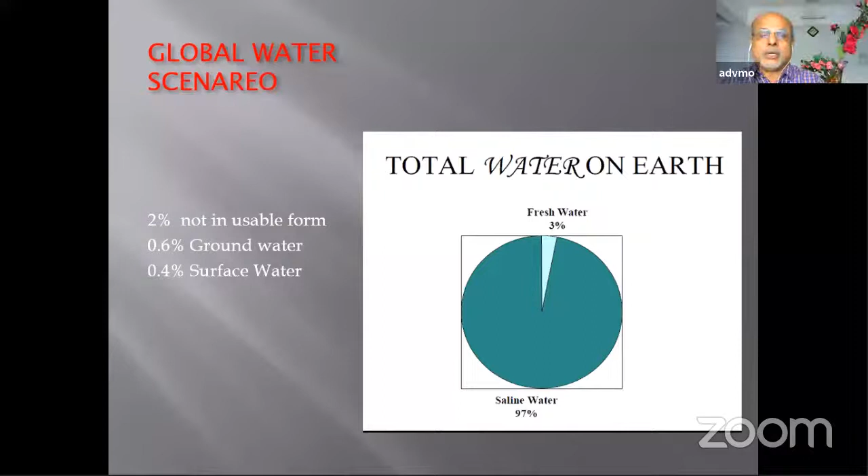Now, when we quantify the water availability, globally, there is 22.62 million cubic kilometers of water available. And in India, we have 253 billion cubic meters. And coming to Kerala, the availability is 6.62 billion cubic meters.

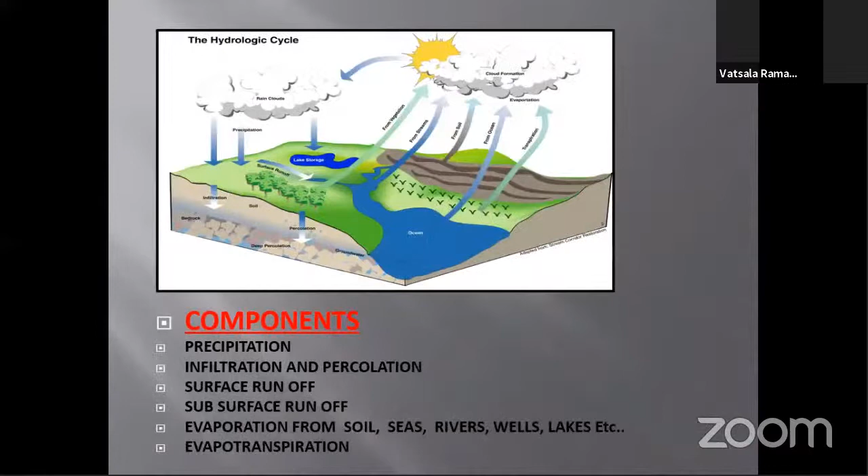Now, let us have a very preliminary idea of what actually groundwater is, because we are going to discuss the use, conservation, and recharge of groundwater. We should know, not the high technical definition, but at least what actually is groundwater and what actually is not groundwater.

You might have come across this hydrologic cycle. We know the water available on earth is in a cyclic process. These are all the components of this hydrologic cycle. One is precipitation, the rainwater reaching the surface of the earth. When the rainwater reaches the surface, one portion passes to the rivers and streams as surface runoff, then a little portion percolates into the earth, which again gets transferred to the rivers and seas as subsurface runoff.

Then a particular portion will be going and reaching the groundwater resources. From the surface, water will be evaporated to the atmosphere from the seas, rivers, wells, lakes, from everywhere. This water will be evaporating and entering into the atmosphere. Even from the leaves of the trees, a particular quantity of water will be evaporated, called evapotranspiration, which also joins the atmosphere.

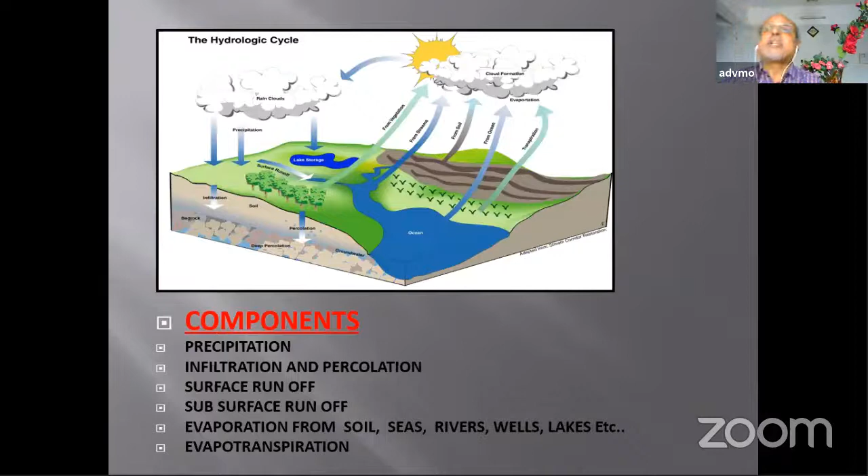So when we think about groundwater recharge, we should bear in mind that we can alter either component of the hydrologic cycle. Either we can reduce the surface runoff or the subsurface runoff. Reducing the surface or subsurface runoff will invariably increase the percolation rate. This is the basic principle - manipulation of any component in the hydrologic cycle is the principle behind groundwater recharge.

Why I'm highlighting this definition is because there is a misconception about groundwater even among educated people. For some people, the water they're tapping through borewells and tube wells is the only groundwater, and the water tapped through open wells is not groundwater. But precisely applying this scientific definition, whatever water we tap through open dug wells, borewells, tube wells, or filter point wells - every one of that is groundwater.

Because of this misunderstanding about the groundwater definition, even the educated community thinks that when we drill some borewells in particular places, that will affect or grab away the full groundwater resources and affect the open dug wells in that area.

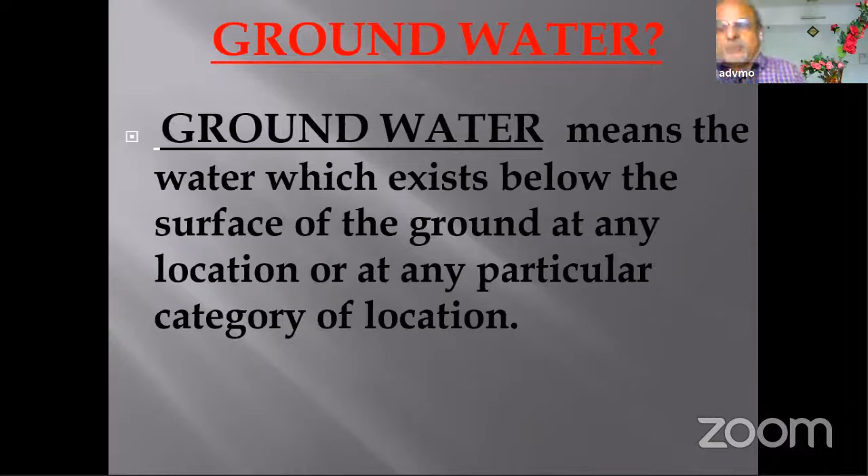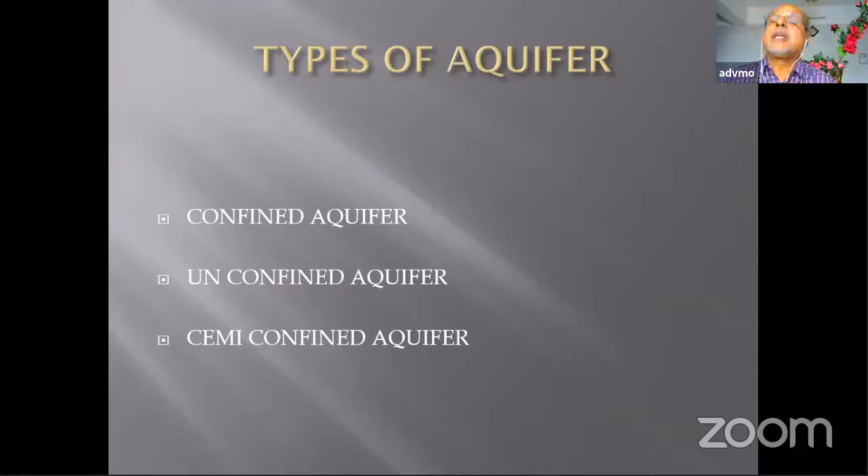There are three types of aquifer, such things we will leave - one is confined aquifer, unconfined aquifer. The thing is, almost all open dug wells tap the unconfined aquifer, and almost all borewells and tube wells tap the confined aquifer. Notice that these two - confined and unconfined aquifers - generally in 99% of cases are not interconnected. So the interference between borewell and open well is a misconception in general terms.

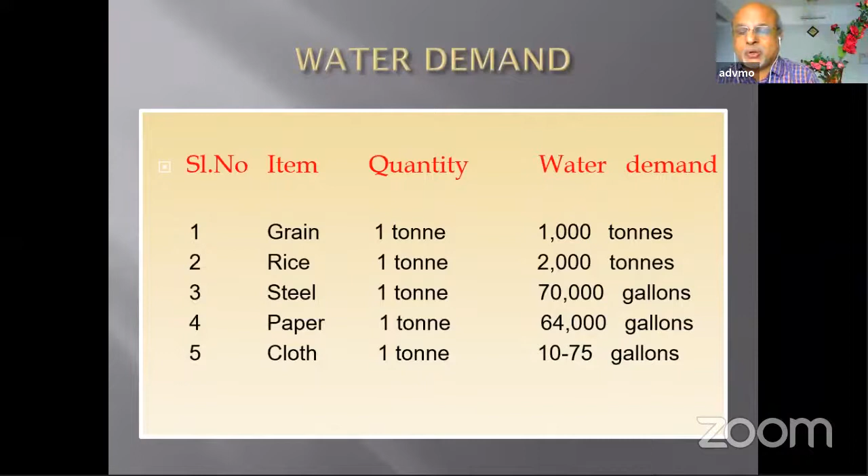Now let us look at the various water demands. For producing 1 ton of grain, we need 1,000 tons of water. For producing 1 ton of rice, we require 2,000 tons of water. You may wonder why we need water for producing steel, but to produce steel we require 70,000 gallons. And even for producing 1 ton of paper, we need 64,000 gallons of water. For 1 ton of cloth, depending upon the variety, the demand varies from 10 to 75 gallons.

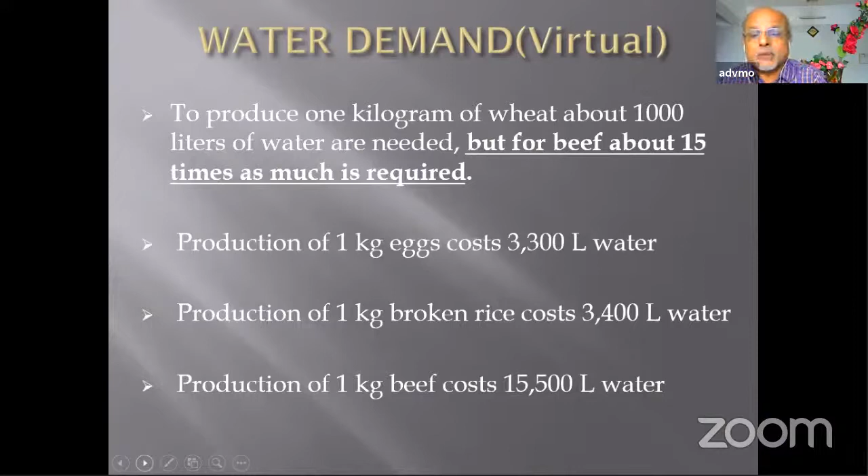Production of 1 kilogram of wheat uses 1,000 liters of water. When 1 kilogram of cooked beef comes to the table, we should realize we are consuming 15,500 liters of water. Production of 1 kilogram of egg costs about 3,300 liters of water, and 1 kilogram of broken rice costs about 3,400 liters of water.

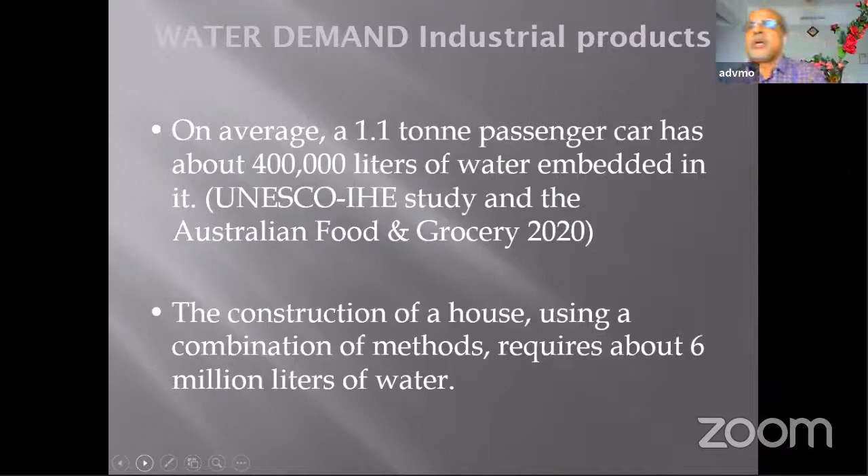UNESCO-IHE and the Australian Food and Grocery Association recently produced a report saying on average people use 1 or 2 motor vehicles. A 1.1-ton passenger car has about 4 lakhs of liters of water embedded in it. The construction of a small house using conventional methods requires about 6 million liters of water.

See how we are using water, just think about the way we use it. In every house we have 3 to 4 flushes. When we flush our tank in the bathroom, 13.5 liters of water goes. On Indian average, the use of water by a citizen is 135 liters, but for a Kerala citizen it is computed at 200 liters. That means we are wasting 65 liters of water.

Our literacy is 100%. Look at the shower bath. Normally when we take a shower, singing some 2 or 3 film songs, spending 10 minutes, 225 liters of water will be gone.

When we clean our teeth after opening the tap for 10 minutes, 18 liters of water will be gone. If we brush our teeth keeping the tap closed, 1 liter will be gone.

It is computed that considering a lifespan of 80 years, a human being in his whole lifetime, before leaving this world, will use 57 lakhs and 60,000 liters of water.

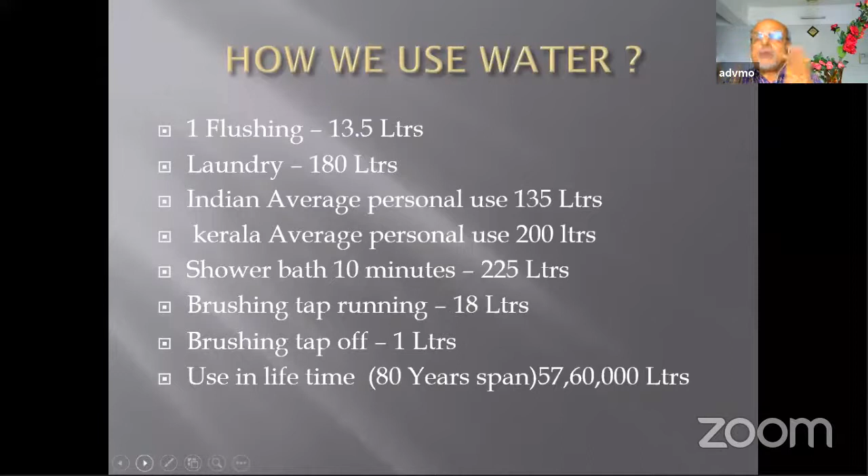Why have I given all these statistics? Not just to bore you, but to help you understand the way we are using water, the extreme necessity of water, how precious this resource is, and how we are misusing it. This is just to give you a background idea.

Hello? Yes, we are here. Either use your chat box or unmute and tell me roughly how much quantity you presume is needed for constructing such a concrete block. Any idea? No idea, no idea. Nobody has any idea. Never thought of such things. That is what I think, because we may think it's none of our business to think about such quantities.

We need 30 to 40 liters of water to produce such a concrete block. Why do I mention this? Because think about the number of blocks needed for a single house. One single block may consume 35 to 40 liters of water. So when you multiply by the number of blocks needed for a house, you can compute how much quantity is required.

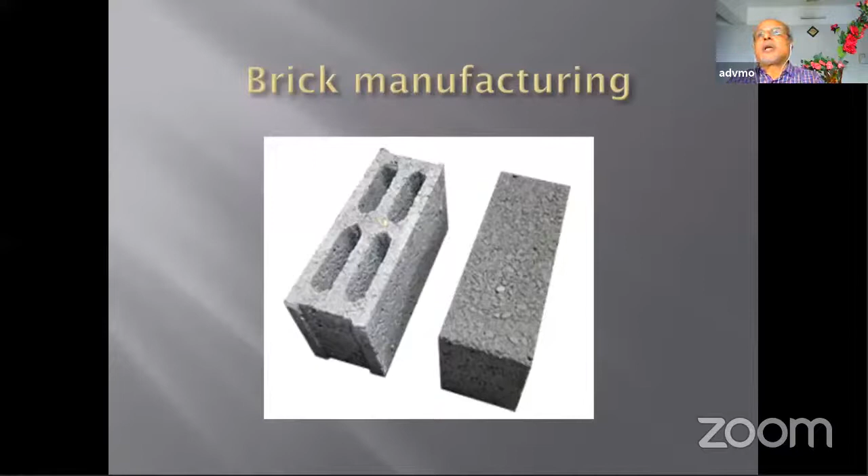Nowadays we are not depending on wells for our water requirement, but on packaged drinking water. This 20-liter bottle that comes to every house and flat, everybody purchases. We don't know how pure it is, whether it's potable, or where it's coming from. This is a very big industry now, and there's also the water tanker lorry business.

In almost all luxury flats, they depend on tanker lorries for 3 to 4 months. Such flats and satellite townships are coming up all over Kerala in a drastic way. In a satellite township, the number of families can be 400 to 500, so you can compute the water usage.

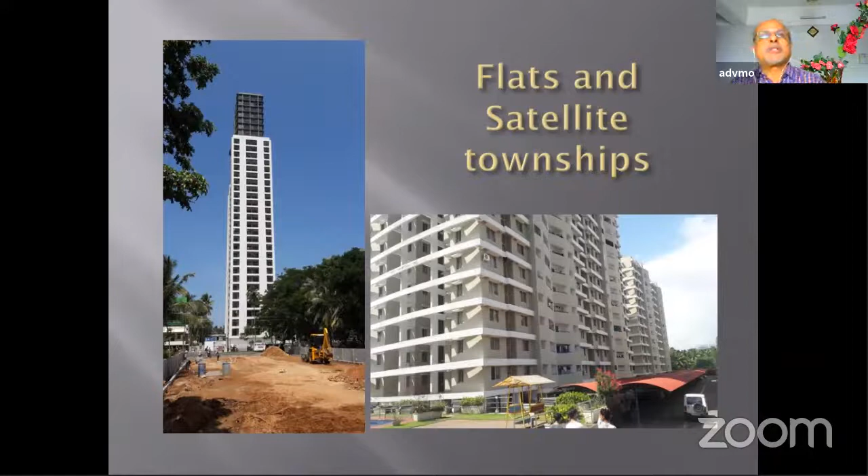If the minimum requirement is 500 liters for a family, from a single place we have to tap a huge quantity of water for their domestic purpose. Not only domestic purpose, but almost all luxury flats have recreation facilities like swimming pools, which also require a huge quantity of water.

So the resources are very limited. That is the 1% which is available, which I showed in the beginning. And so now the situation is such that there is big war, big quarrel, big conflict in sharing these precious resources.

The conflict may be between nations, between states. You may be knowing about the Kaveri issue and the Mullaperiyar issue, all about sharing natural resources. Now even sharing water within a panchayat causes very big conflicts. So newspapers are writing editorial columns about the water war. That is the reason for this water war.

Now I am focusing on Kerala geology and Kerala resources only. Kerala is a very small land mass having an area of 38,863 square kilometers. We have 14 districts, 152 development blocks, 44 rivers, receiving 3,300 millimeters of rain, which is 2.75 times more than the national average. We have 34 lakes.

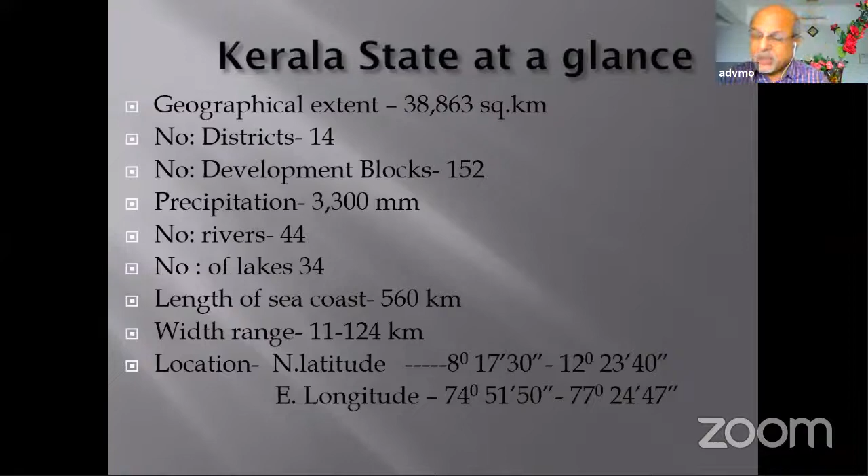We have 44 rivers and 3,300 millimeters of rainwater. But we know more than 37% of the Kerala population is devoid of drinking water. Here it is very crucial to assess the resources.

What happens? Kerala is peculiar, having some unique features. 90% of the drinking water schemes in Kerala depend upon groundwater, and more than 60% of the population depend upon open wells. Kerala is a place having a unique well density, not found anywhere else in the globe — the well density is 250 to 300 per square kilometer.

There is no other place in the whole world having this type of high well density. In Kerala, we have 95 lakh open dug wells. You can imagine, assuming the cost of one dug well is 1.5 to 2 lakhs, how much amount Kerala has invested in the construction of open dug wells.

And here we need to assess, what is the condition? We have 44 rivers, but is it a myth? If 44 rivers are there in such a small landmass, we should not have water scarcity. But look at these 44 rivers — why?

Because earlier our planning experts had a concept that Kerala is a land surplus in both surface water and groundwater, just because we have 44 rivers and 3,300 millimeters of rainfall. These two are the things we need for the requirement of water.

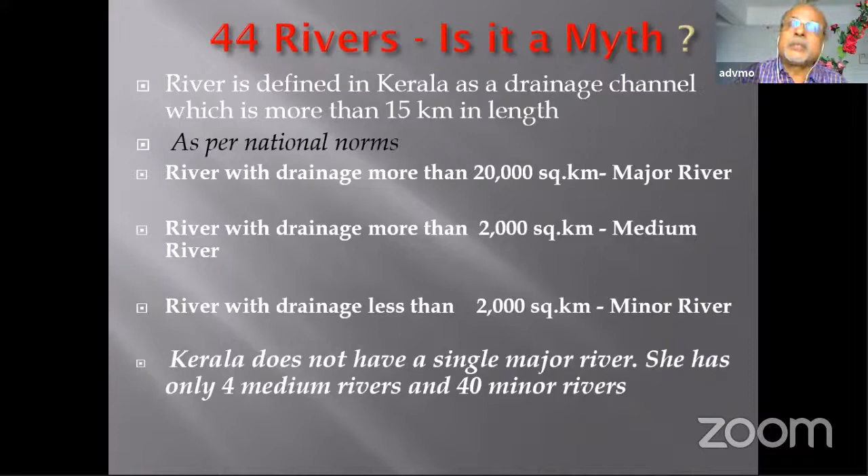When we apply the national norm of classification to these rivers, we can see that out of these 44 rivers, Kerala does not have even a single major river. Ultimately, what we have is only 4 medium rivers and 40 minor rivers. So this number of 44 rivers is only a magical number.

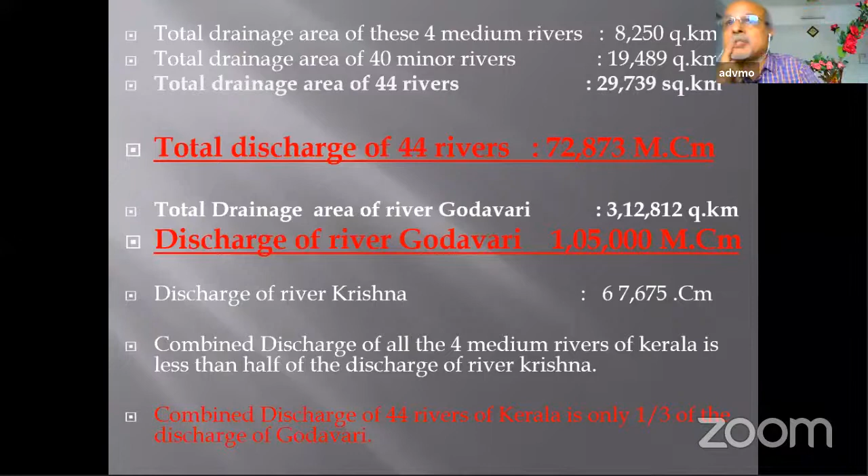This points out that we cannot depend upon the 44 rivers in such a small area. What is the position of the river? It means it is not even equivalent to half of the Godavari.

Now come back to the Kerala rainwater scenario. This bar chart indicates a comparison between rainwater availability with some adjacent regions. You can see from the bar chart that Kerala is the place having the maximum rainfall, that is about 3 meters.

None of the other states receives even half of that rainfall. So Kerala is receiving that much rainfall.

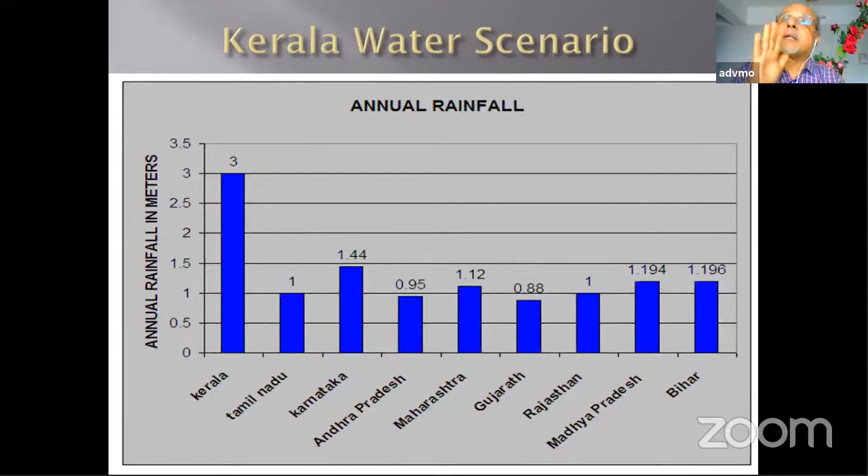Now look into this bar chart comparing surface water availability and groundwater availability. The blue bar indicates surface water availability, and the brown bar indicates groundwater availability. In the previous slide, you saw that Kerala has the maximum rainfall, more than 2.75 times the national average. But comparing to nearby states like Karnataka, Tamil Nadu, and Andhra Pradesh, Kerala is one of the states with the least availability of groundwater and surface water.

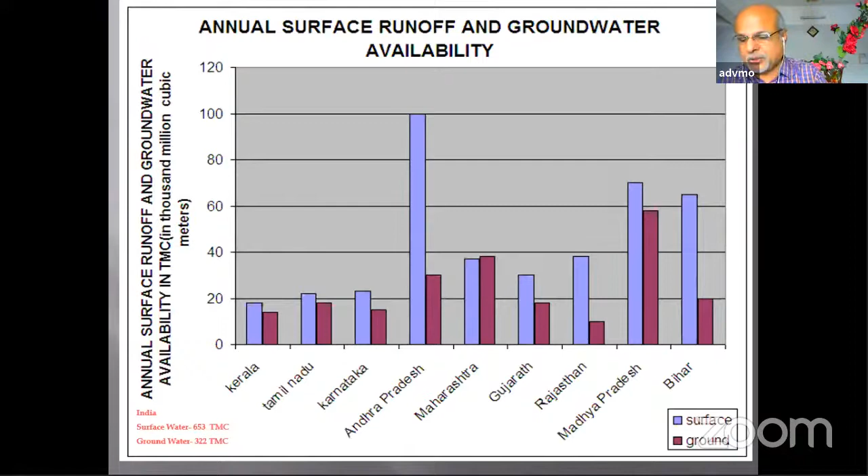There's another important metric: per capita water availability. We receive 3,300 millimeters of rainfall, which is an index of richness. But the more specific thing is how much water a person in Kerala actually receives, the per capita water availability. That is the true index of richness of water.

We know that on one side we receive 2.75 times the national average rainfall, but on the same unit of land in Kerala, we have to support 3.6 times the biomass, food, and even drinking water needs, because Kerala has the maximum density of population. So while we receive 2.75 times the water, we have to feed 3.6 times the population with it, which reduces the per capita water availability.

A recent study computed over the last 100 years shows that total water availability in a particular landmass would remain constant, but as population increases, the per capita availability naturally decreases.

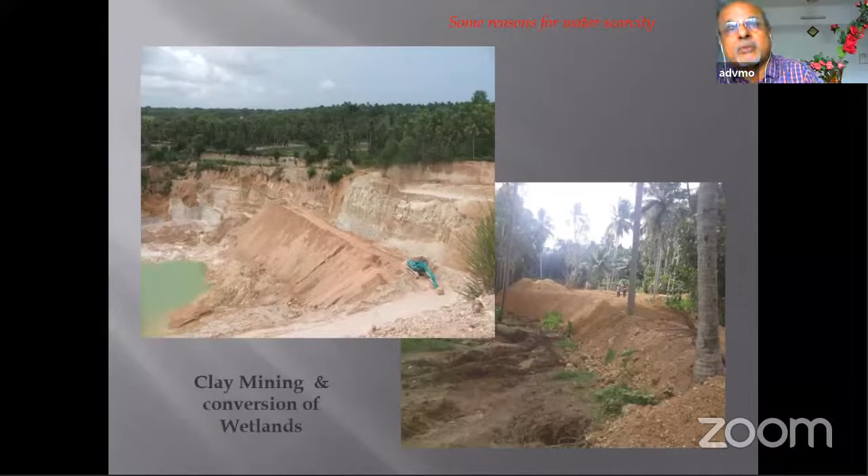You may ask: don't we need this kind of development? Yes, we need development, but there should be a limit, a limit on how much clay, how much wetland we can convert. In some places, there cannot be a chance for even a single person. Then our option is whether we should preserve water availability or go for development.

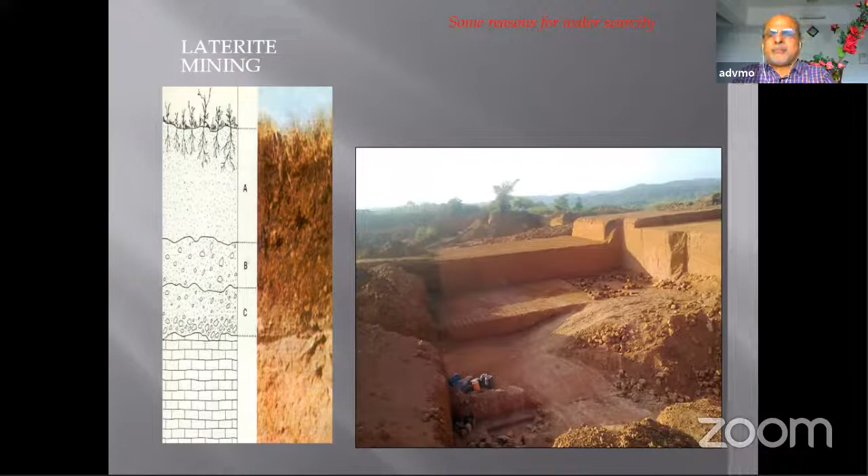This is a laterite mining quarry. You can see laterite being mined very extensively from the surface of the earth, which adversely affects the groundwater.

This is indiscriminate pumping. This was previously seen in Tamil Nadu, when the Tamil Nadu government started a scheme where industrial and farming users need not pay electricity charges. The same rule is now being applied in Kerala. Any farmer can pump groundwater extensively and indiscriminately. So that is what we are doing.

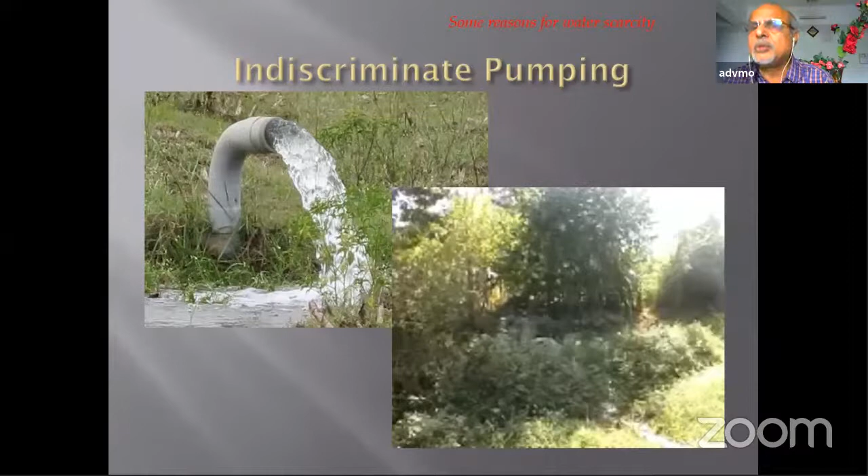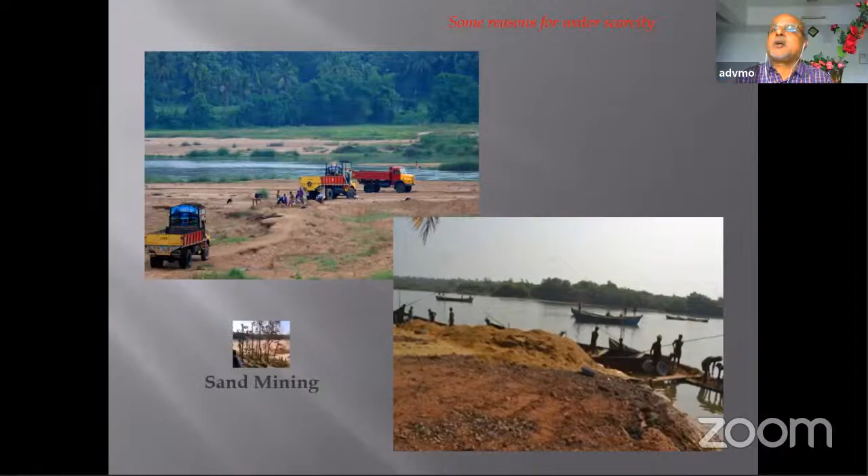Due to this indiscriminate pumping, a very huge quantity of groundwater is being wasted. You might be aware of sand mining, sand mafia even. Now it is called sand mafia because they are not taking sand, but they are mining it.

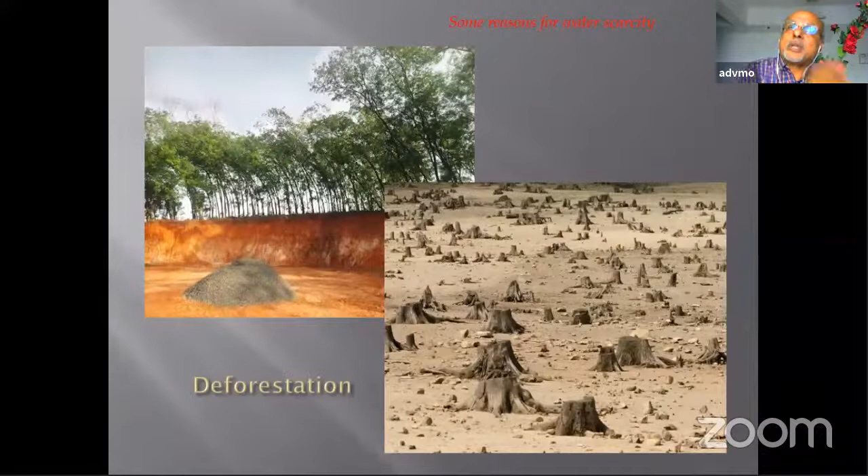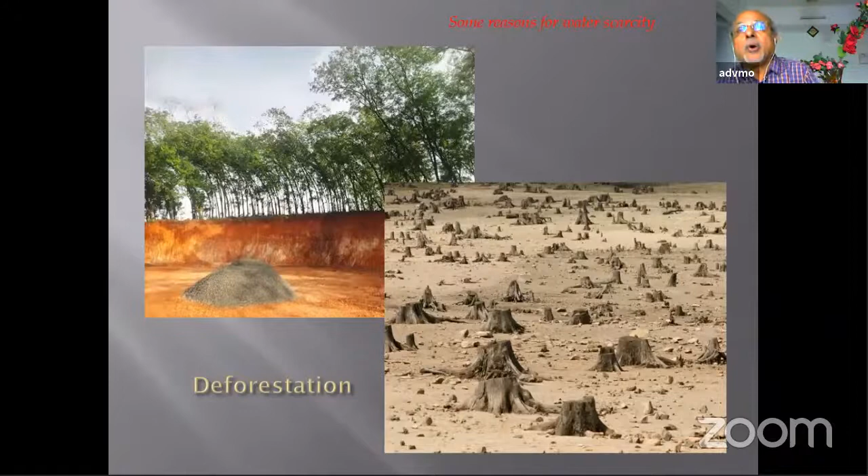So by nature itself, we have a shortage of water, groundwater. With our activities, we are making the situation even more adverse.

Now here comes the relevance of artificial recharge. The artificial recharge is a term talked about very extensively, very elaborately. Precisely, there are so many technical definitions. What is artificial recharge? Transferring surface water to the aquifer by human interference - that is called artificial recharge. Any drop of water, if we can transfer to the aquifer with our interference, that is called artificial recharge. Precisely, any man-made activity that adds water to an aquifer may be considered as artificial recharge.

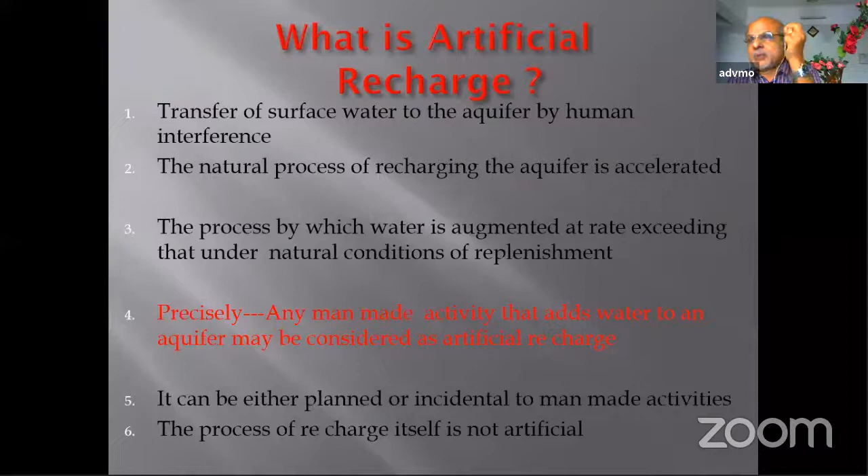Let us not bother about all the technicalities and technical definitions of artificial recharge. Whatever, if with our effort we can contribute a single drop of water to the below-lying aquifer, that is called artificial recharge. The artificial recharge is an essential thing nowadays. Why?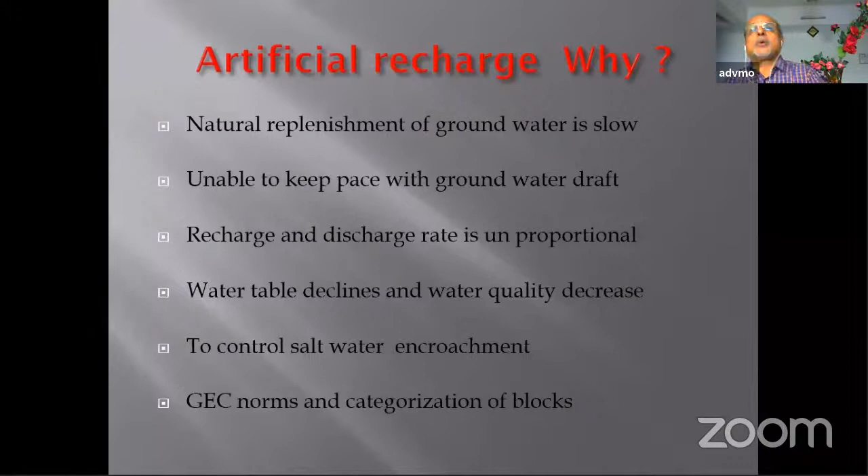The balance will be changed, and there happens a sharp depletion of water table. So in order to control or make up the groundwater balance, artificial recharge is needed.

There are conventional methods. Our predecessors were very much aware of groundwater conservation techniques. One is terracing - in almost all our cultivation types, this practice was prevailing in Kerala. Nowadays the cultivation pattern has changed, and many changes happened in land use. So now only in a little bit of area do these old methods prevail. One of the old artificial conservation techniques is terracing - to reduce the slope of the terrain and make it into terraces so that the surface runoff, which you have seen in the hydrological cycle, will be reduced.

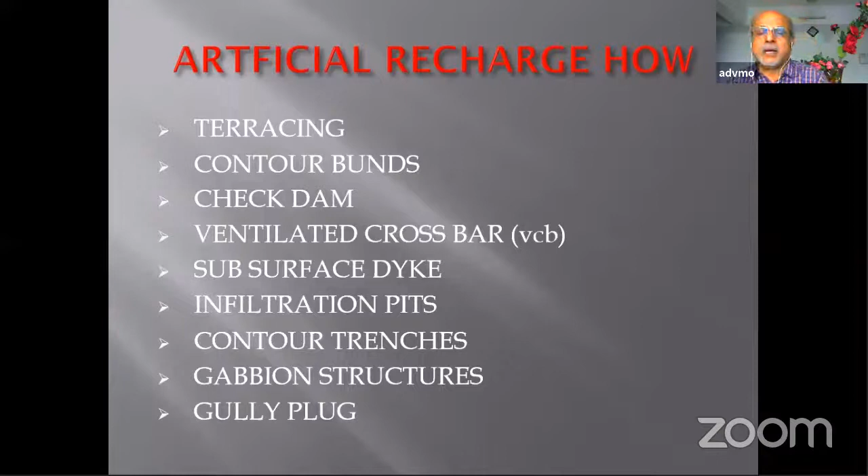Then contour bunds - construct bunds parallel to the contour. Then check dams - small dams across the streams, then ventilated crossbar, then subsurface dyke, that is an underground dam constructed beneath the ground which will arrest the flow of groundwater, and by that way increase the water level on the upstream side of the subsurface dyke. Then infiltration pits, to allow rainwater to recharge these pits. Then contour trenches - construct unified trenches with the same dimension parallel to the contours. Then gabion structures, then gully plugging. I shall show you some figures.

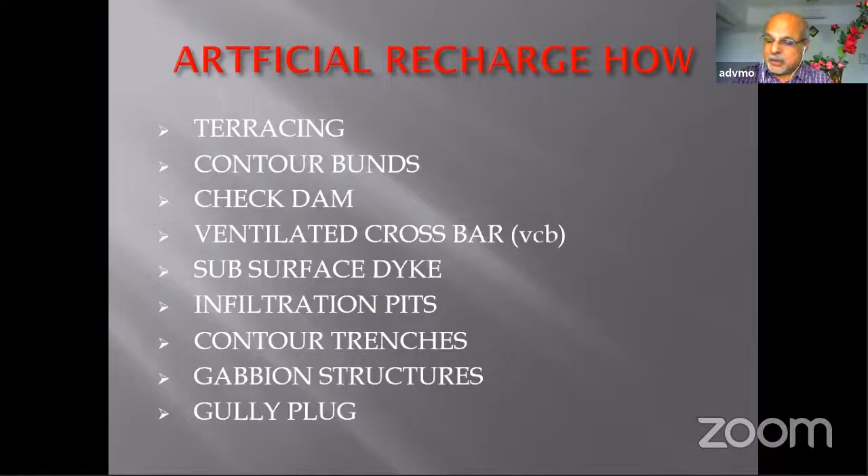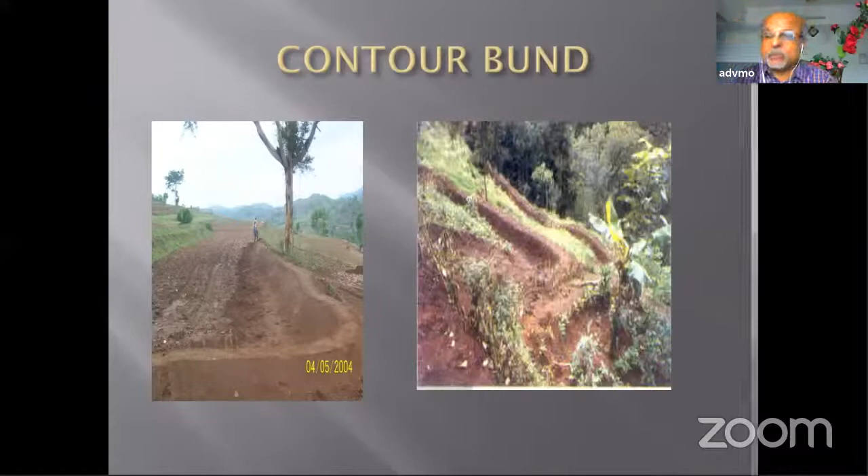Now this is contour bunds - construction of bunds parallel to the contour. Ultimately these contour bunds will withhold the flow of surface water, reducing the velocity of surface runoff, thereby allowing more water to percolate into the ground surface, into the aquifer below. So this is a typical picture of a contour bunded area.

That water can be used for different purposes, agriculture and drinking purposes. At the same time, this impounded water will recharge the nearby open dug wells, thereby increasing the water potentiality of the open wells in the nearby area.

But while constructing, there are some scientific principles which should be strictly observed in constructing a dam across the rivers. If we construct the check dam unscientifically, that will even lead to the death of the river. What is happening in Bharatapuzha now, the main reason for its death, is unscientific construction of check dams.

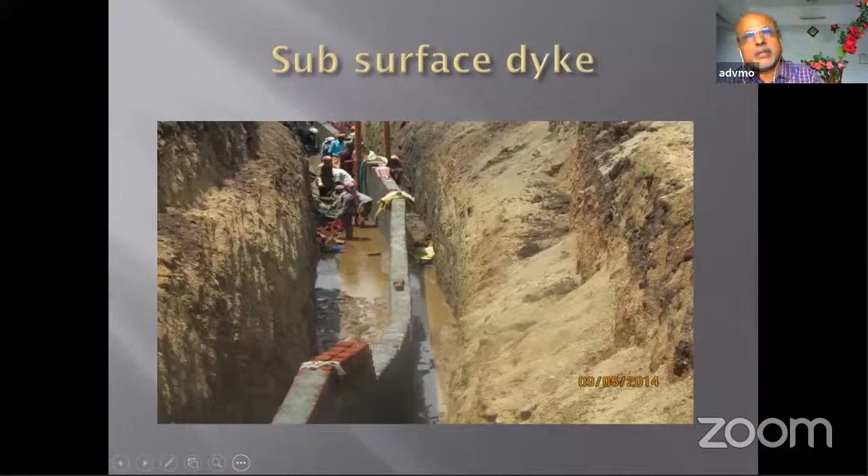Now this is another check dam, the diagram of the subsurface type. You can see a very big concrete wall being constructed underground, joining two hillocks. This is an impervious concrete wall, nothing will be seen on the surface, and it will arrest all the groundwater flow. On the upstream side of this check dam, the water level will increase, but there will be some adverse effects on the downstream side.

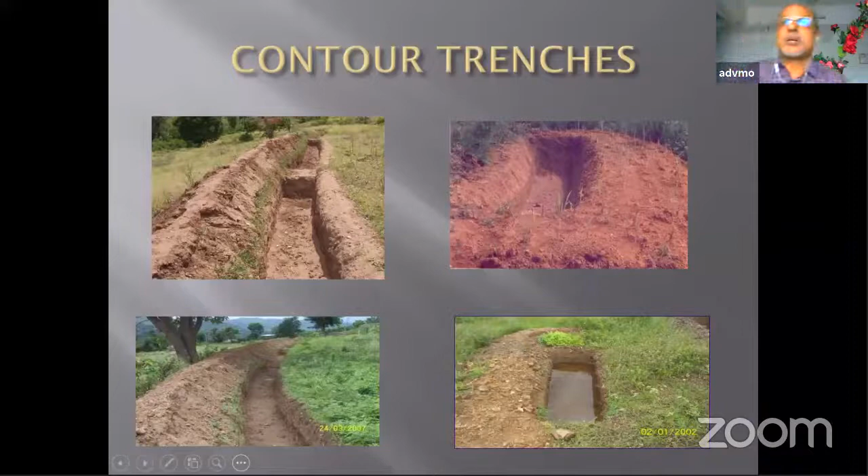Now this is contour trenches, construction of trenches parallel to the contour, which will ultimately reduce the flow of surface runoff and allow the rate of percolation to increase.

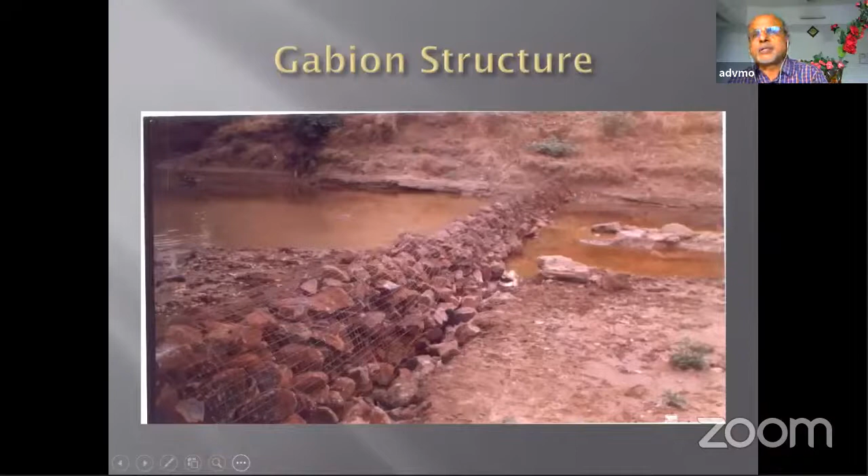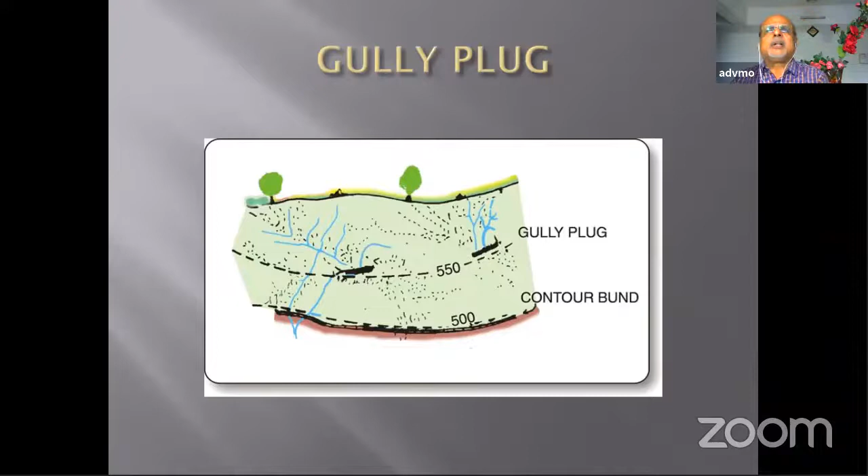These are all conservation techniques which were prevalent in Kerala, and during that time they were not facing this much water threat. Now these are all in archive; we cannot even find the pictures nowadays.

We have very big temple ponds, and almost all these temple ponds are groundwater recharge structures. But what we are doing is filling almost all the ponds. Even in Calicut, from where I'm talking, there were 21 large ponds, upon which now we can see multi-storied buildings. So these temple ponds are also very good groundwater recharge structures.

Now these conventional structures have some limitations. One thing is these conventional recharge structures need a large area and huge amount of resources. Then it is a community-based program, which is very difficult in Kerala, and it has some negative effects, creating environmental issues. The main thing is the result is not point specific.

If somebody asks, if I do one check dam construction, will it improve my well? You cannot say, because that check dam will improve a whole area, not a specific point. So there are modern concepts where we come to rainwater harvesting, aquifer well recharge, water recycling, desalinization of water. These are all modern concepts of water conservation and use.

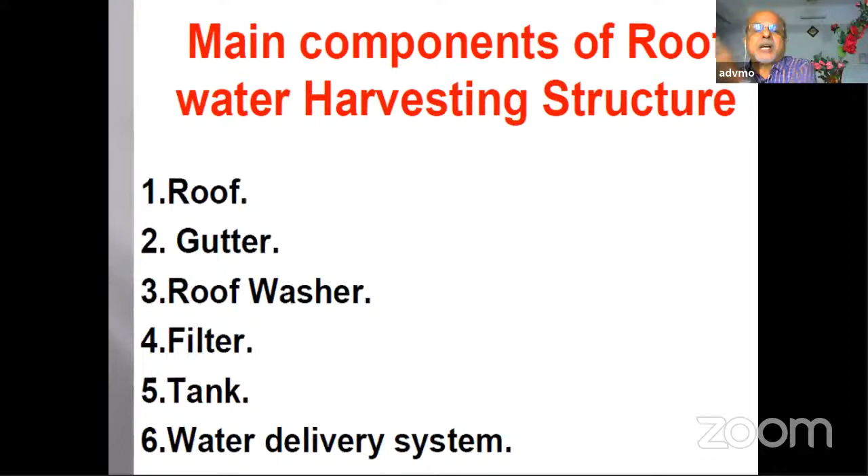So what is rainwater harvesting? I think you might already know about it. These are the main components needed for roof rainwater harvesting: we need a roof, gutters made of PVC pipes, a roof washer, a filter, and a delivery system.

Here we should be careful about recharging a well using rainwater. Without filtering, we should not charge that water into the well, because it will go to the aquifer. Once we pollute the aquifer, it will take years to purify it. The pollution and purification of an aquifer are totally different matters. If you pollute a river, within 24 hours of removing the pollutant from the source, the river will be clean. But once you pollute the aquifer, it will take years to depollute it.

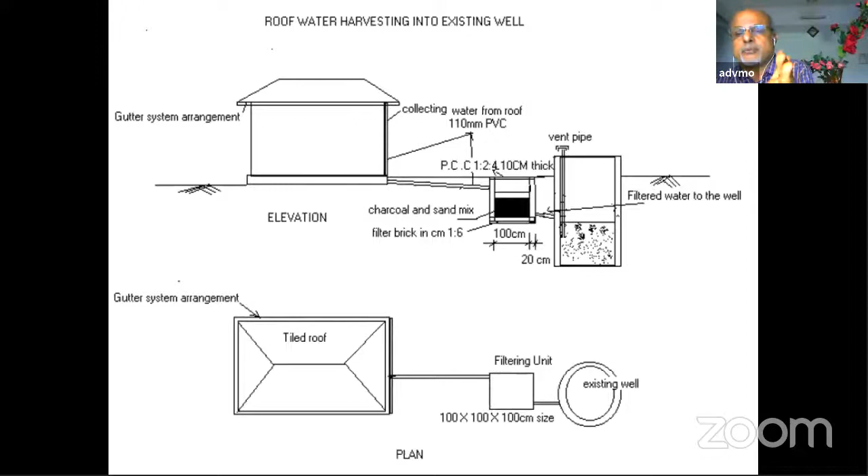So we should be very careful when injecting any drop of water. That is why normally rainwater is pure and won't have much chemical content. But even then, we have to filter it before charging the well. The type of filter we will discuss later. So once it passes through the filter, then it will be charged into the well.

In the same way we can charge. There are many borewells in Kerala which are becoming dry or showing a decline in their water levels. By collecting water from the rooftop, we can recharge a borewell too. We make an excavation around the well and fill it with filter material, which we'll discuss shortly. Water injected through that filter media goes to the confined aquifer lying at a deeper level, thereby improving the quality and quantity of the aquifer.

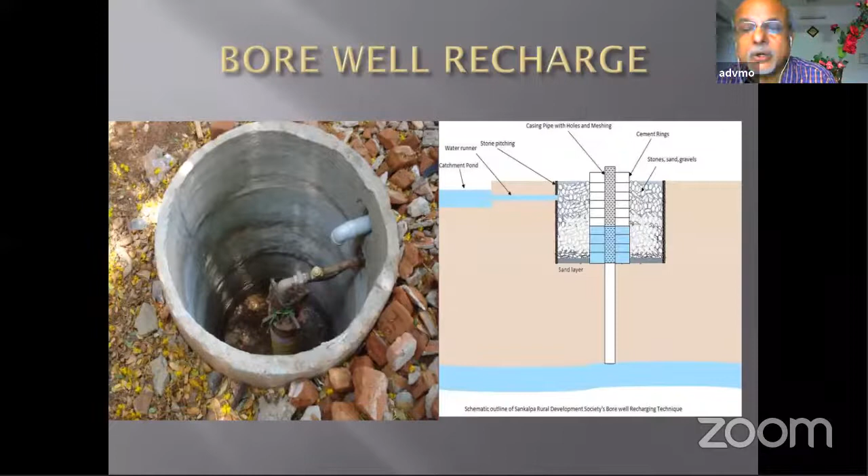This is the recharge pit. Instead of transferring the water directly to the well, here we are recharging a pit.

This pit construction is very simple. We can adopt this even in town areas with very limited land holding, say 3 to 5 cents of land. We can construct such pits around the compound wall, filling them from the top without losing any surface area.

The roof water, once collected into the gutter, is transferred to the pipe and simply injected into these pits. If you have an open well within the compound, it will directly influence that well. Even if you don't have an open well, it will favorably influence the neighbors. This is the recharge pit, and such recharge pits can even be constructed on small land holdings.

We can do one thing more: before charging into the pit, we can construct a water tank. Most flats and villas have such tanks. We filter the water first, then charge it from the overflow directly into the pit. That way, we can conserve water usable for at least 4 to 5 months.

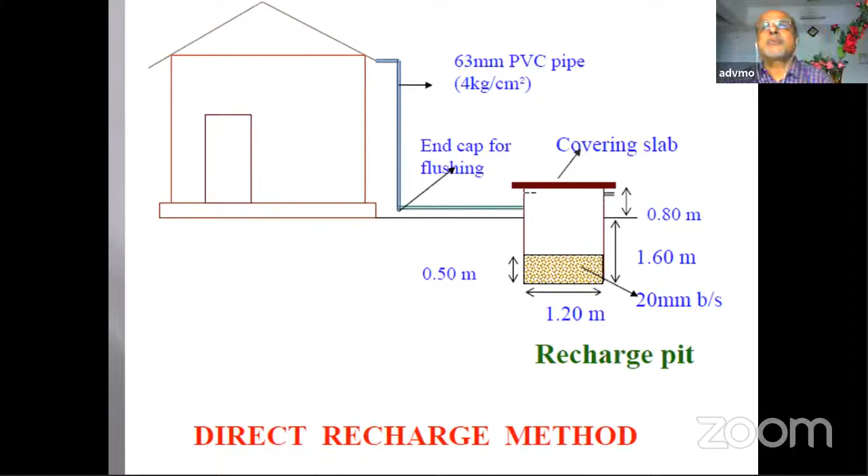Suppose it is a Sintex tank of any volume: the bottom 10% will be filled with metal or gravel, the next 10% with sand, another 10% with activated carbon, again 10% with sand, and on top you can fill it with either metal or gravel. The upper 50% of this portion will be left empty.

Once water is collected from the roof, it passes through this filter, and the filtered water goes to the well or the sump, according to our plan.

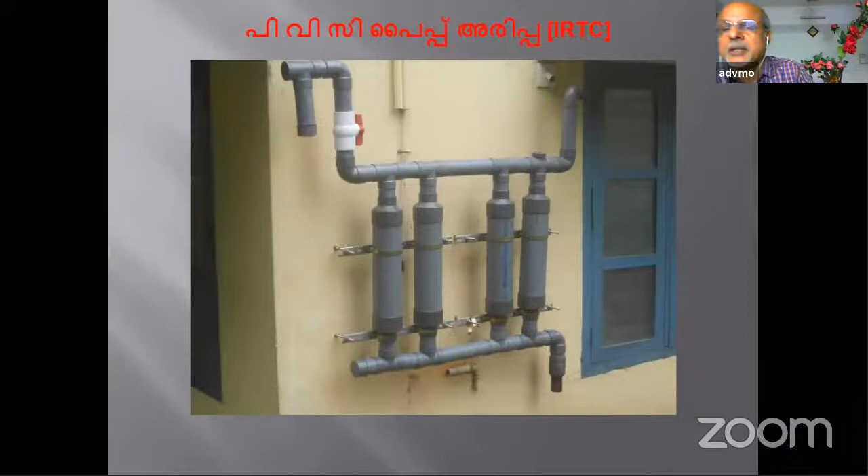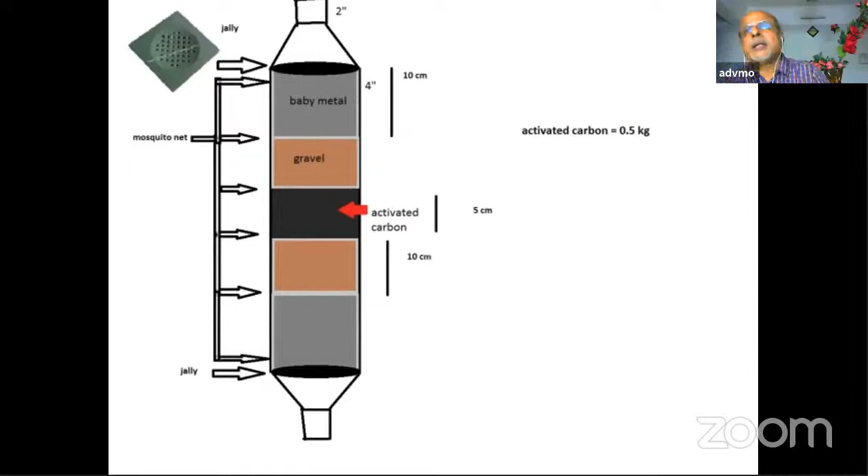Now this is another model, a simplified conventional filter where the filter material is packed inside a PVC pipe and connected. This we can fix onto our house walls. This is the inside of the filter: on top you can see baby metal, gravel, activated carbon, and there is one outlet and one inlet. The inlet connects to the rainwater, and the outlet goes either to the sump or the well.

But as we have seen, these conventional filters have some limitations. Filtering fails due to choking, since over prolonged use the filter gets choked with dust particles. That is one limitation. Also, major particles as well as very minor, micron or millimicron size particles will not be filtered. Another limitation is if our roof area is very big or the quantity of water to be filtered is very high, we invariably need large size filters, and these need periodic maintenance. These are some of the limitations, but even with that, we can use it.

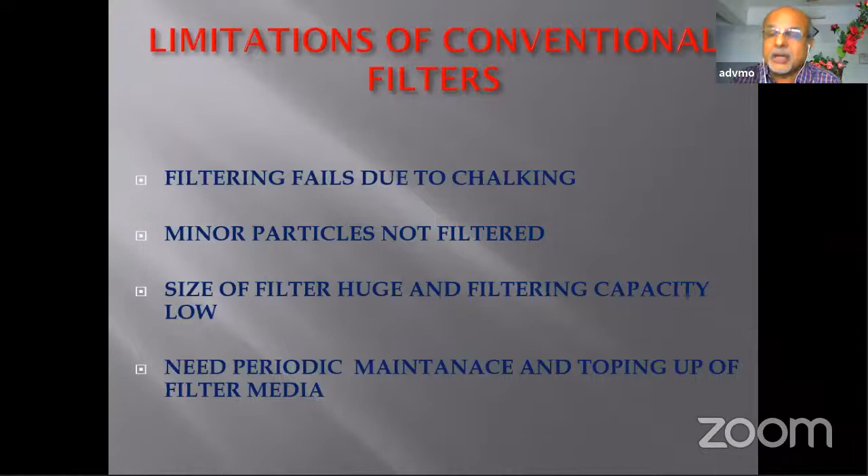But we have the latest model filters available in the market, which are very neat. We can simply fix them with the help of a plumber using 2 clips.

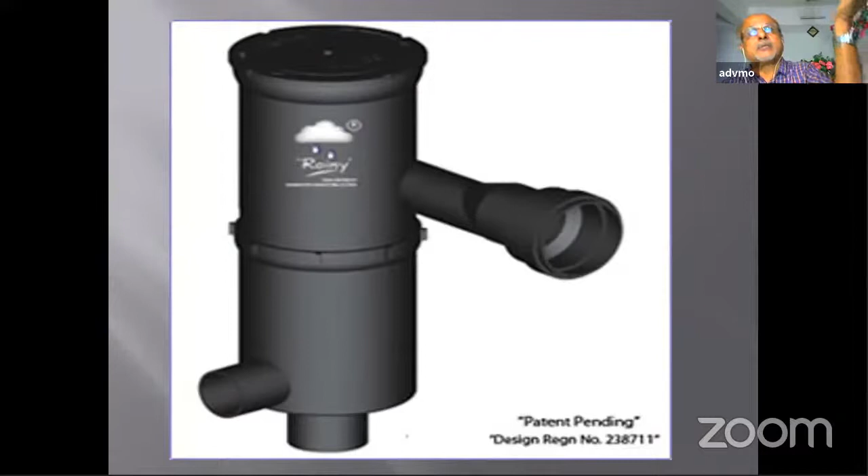We can fix it into the wall and connect the outlet of the rainwater collection to the inlet of this rainy filter. This is called the rainy filter. You can connect the rainy filter inlet, and the outlet you can recharge the groundwater sump, and with the overflowing water you can charge your well.

All the muddy, dusty water will automatically go through the outlet at the bottom of the filter. Depending upon the size of the roof area, or the volume of water we have to filter, the size and pattern of the filter will vary. A certain number of filters are available in the market, roughly ranging from 750 to 11,000 rupees.

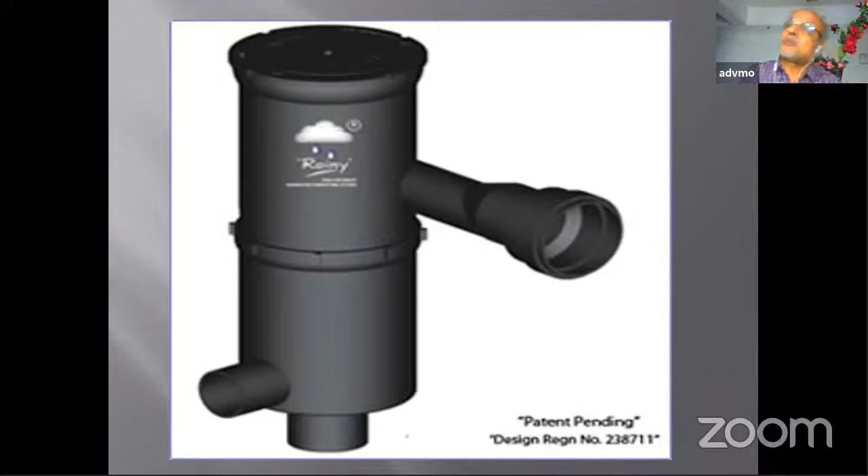Almost all our houses in the town area are already fitted with PVC gutters and drain pipes. The simple thing we have to do is connect this filter, and we will also have one sump. We can charge the filtered water to the sump. We can use rainwater for 3 to 4 or 5 months in a year, thereby saving a huge amount of money. Consider 1 rupee per liter, how much quantity we can save.

This is a rough calculation of how much rainwater we can tap and store from a small roof area. Here, the roof area considered is only 50 square meters, that is the roof area of a bedroom, say 10 meters length and 5 meters width. For such a small roof, the rainfall we are receiving is 3000 millimeters.

There is a runoff coefficient, meaning we will be using different materials for roofing. We may be using tiles, RMP sheet, aluminum sheet, GI sheet. So depending upon the material, there is a runoff coefficient. For tiles it is 0.75. So from a small roof area of 50 square meters, we can compute how much quantity of rainwater we can collect: 50 into 3 into 0.75.

That means 1,12,500 liters of water we can collect. If you put 1 rupee per liter, we can save more than 1 lakh rupees per year by simply putting a rainy filter attached to your home.

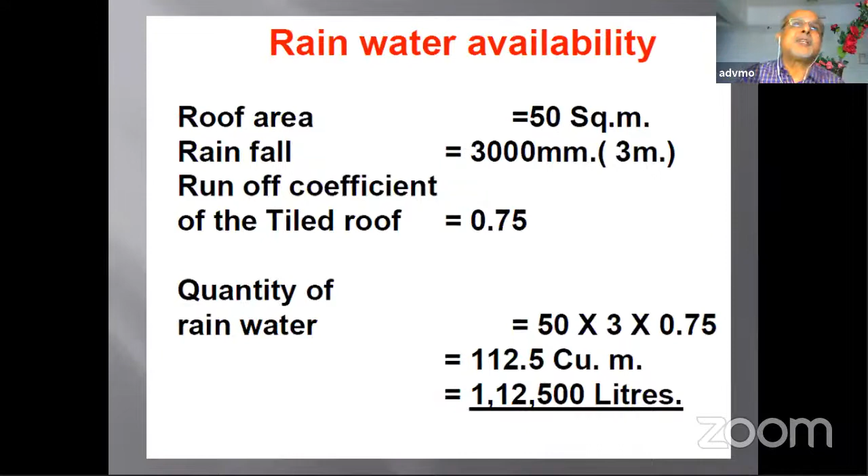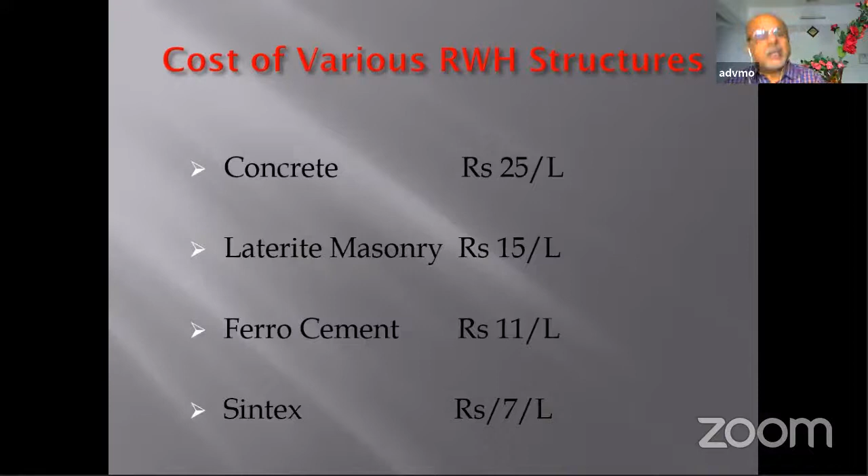So what is the cost of the tank, how much it will come to construct a groundwater sump? This is a rough calculation. If you are constructing it with concrete walls, pakka construction, the rough cost will be rupees 25 per liter. If you are using laterite masonry and such, the cost may come to rupees 15 per liter. Even cheaper, you can construct using ferro cement with chicken mesh, and the cost will be roughly rupees 11 per liter. And if you use a Sintex tank, the cost will come around roughly 7 rupees per liter. There are even cheaper methods by which we can reduce the cost further.

We will discuss something about the quality of water also, and then wind up. The Bureau of Indian Standards has fixed some parameters to decide whether the water we are drinking or using is potable or not. There are some 6 or 7 qualities, some parameters: the color of the water, odor, taste, turbidity, pH value, hardness, then iron content, chloride content, total dissolved solids, calcium, nitrate, fluoride, etc.

These are all the parameters which should be within a desirable range. There are 2 limits: one is the desirable limit, and the other is the permissible limit. The desirable limit is the most ideal limit. For example, the desirable limit fixed for iron content in drinking water is 0.3 parts per million. It can go up to 1 part per million, so up to that it is permissible, but beyond that it is not permissible. Such water needs chemical treatment to remove the iron, etc., before using.

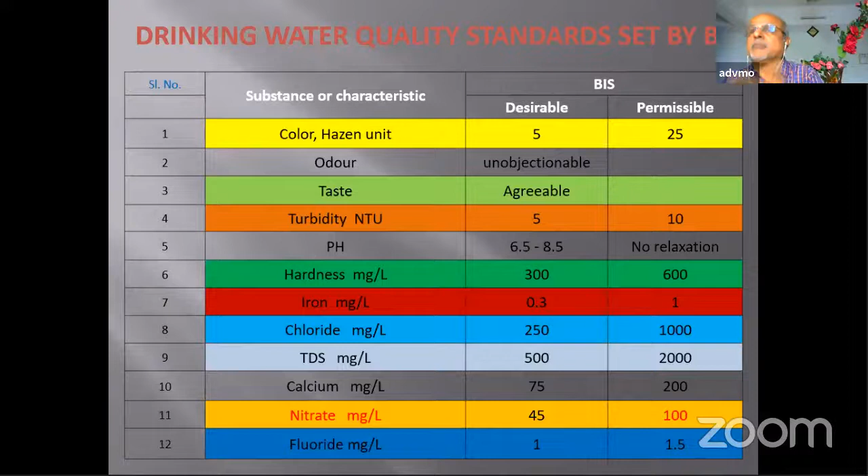So the Bureau of Indian Standards has fixed such parameters for what will be the maximum and what will be the desirable level. These are not all the ingredients though; there are many other rare earth elements and contents that have to be looked into. But normally, to decide whether a water sample is potable or not, these parameters are what's typically considered.

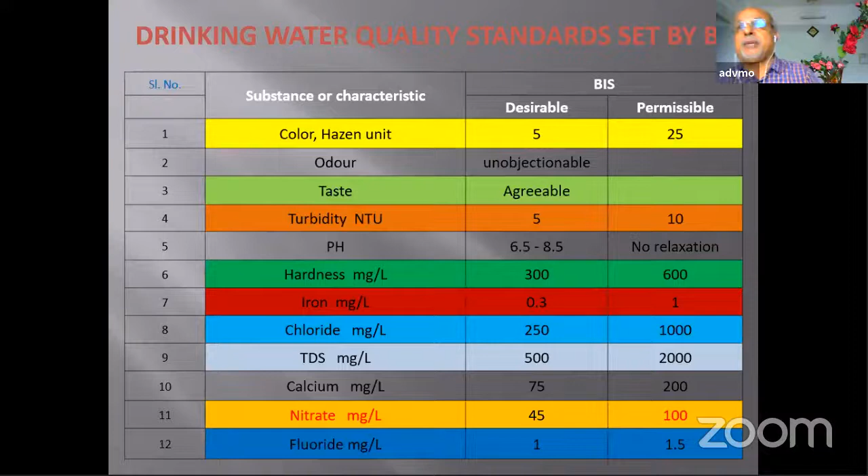If these values are within normal range, that water will be decided as potable. Now, the main quality problems we come across in Kerala: one is the iron content. In many of the open dug well water and borewell water, the iron content analysis shows it is more than 1 ppm.

Then the pH value also - the ideal value is between 6.5 to 8.5. Any value below 6.5, the water will be acidic, and any value above 8.5, the water will be alkaline. In certain areas in Kerala, the water is showing low pH, and in certain areas it is showing high pH. So that water again has to be treated.

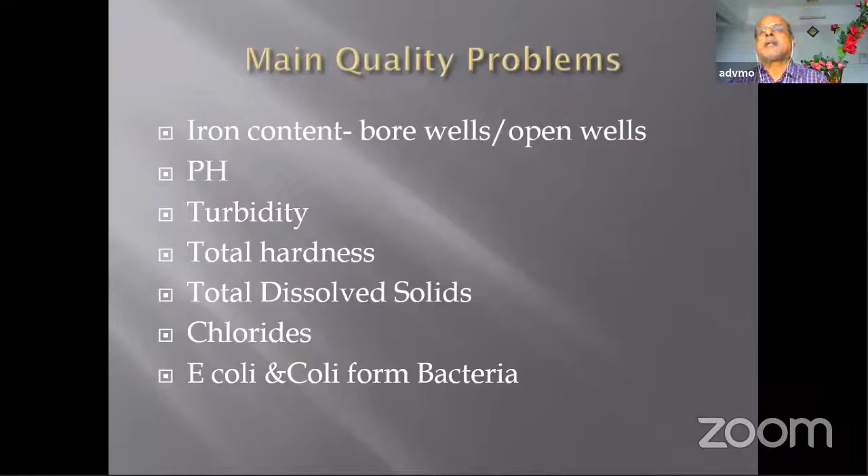Then turbidity, then total hardness. Hardness is due to the high percentage of calcium and magnesium content. Then the TDS, that is total dissolved solids - the limit set is 1000. If the water has TDS more than 1000, that is not suitable for drinking. Then chloride content and E. coli and coliform bacteria - these are all the general quality problems that we come across.

Then in certain water, the lathering of the soap may not happen properly. That is due to the hardness. Hardness means the content of calcium and magnesium will be more than the permissible limit.

When we continuously use such water, there will be black streaks on the teeth. That is due to the high content of fluoride. When this continues, it will lead to dental fluorosis. This disease is called dental fluorosis, and it may also lead to skeletal fluorosis.

There is water in which growth of algae occurs - when we keep a bottle of water, there will be growth of algae. That is due to the high percentage of nitrate and phosphate.

We may come across certain water in which fish may not live - immediately on putting the fish in, that fish will die. That is due to the low pH and the less content of dissolved oxygen. That water is acidic. Then as for salty taste, that is due to the high content of chloride.

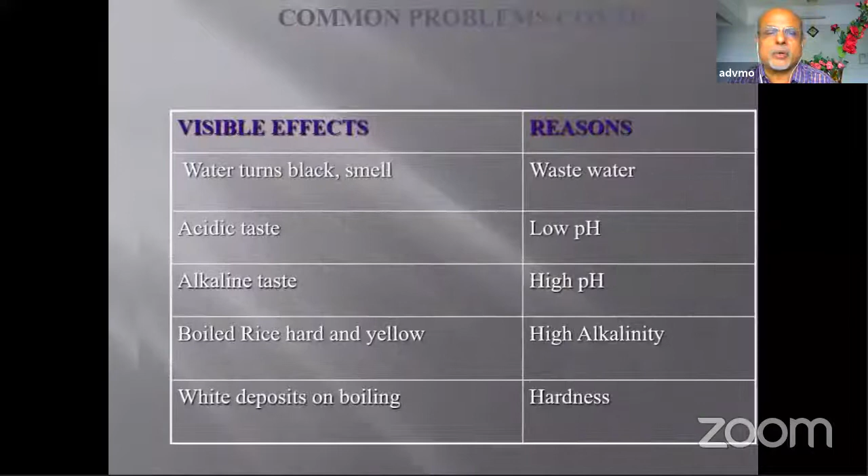Then water turns black, that is wastewater. Acidic taste indicates low pH, alkaline taste indicates high pH. Boiled rice - in certain water, when rice is boiled, it becomes very hard and turns yellow in color. That is due to the high pH value or high alkalinity of water.

And it's a common thing - white deposit on the bottom. When we boil the water, there will be white deposit. This is the hardness of water. So these are all the commonly occurring quality issues.